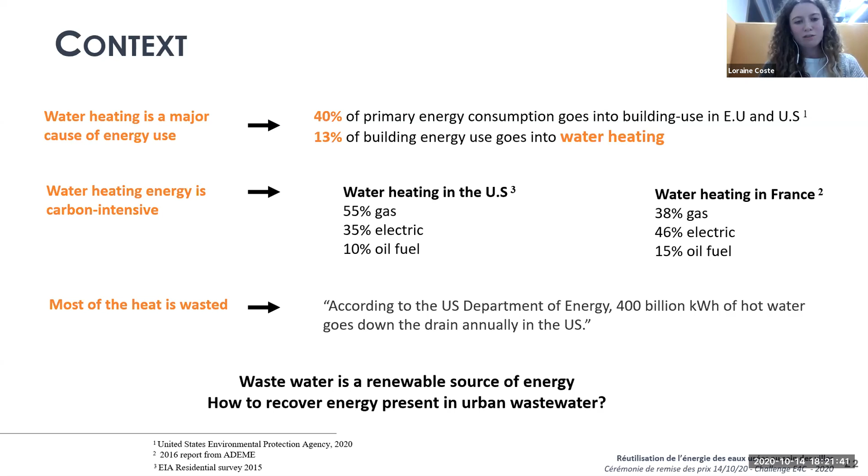Victor, your microphone is not on.

It's okay. So now I'm going to present to you the approach we used for this project. The first step was to properly define the scope of our study. This includes two main elements. The first one is the technologies. By technologies, we mean the machines that can recover thermal energy from wastewater. The second element is the segments. By segments, we mean the group of infrastructure where the technologies could be implemented.

In this step, we had to characterize, quantify, and size all of this infrastructure. Once we did this, we compared the potential of each segment in terms of energy, carbon, and economic indicators. This step helped us to conceive an action plan with a roadmap and the different steps needed to implement these technologies in the city of Paris. And then finally, we assessed the impacts in terms of carbon, energy, and economics of the global action plan.

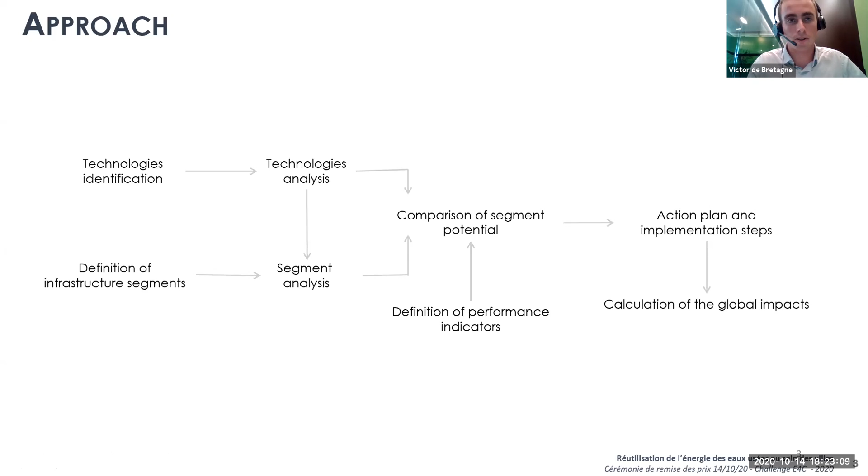In terms of wastewater, we identified three different sources of energy: mechanical, thermal, and biomass. The first two, thermal and mechanical, involve physical processes that can be valorized physically, so those are the ones we chose to explore. The last one is mainly based on chemical processes and is already valorized in a more central way, mostly in the sewage treatment plant outside of the city. As it is outside of the city, we considered that it was out of the scope of the study.

The interest of domestic waters lies essentially in their proximity to the need and to the heat takers. They also come under the responsibility of actors closer to the individual, with the possibility of smaller projects on the scale of neighborhoods or dwellings. And runoff water has a very low potential, so we did not dwell on that.

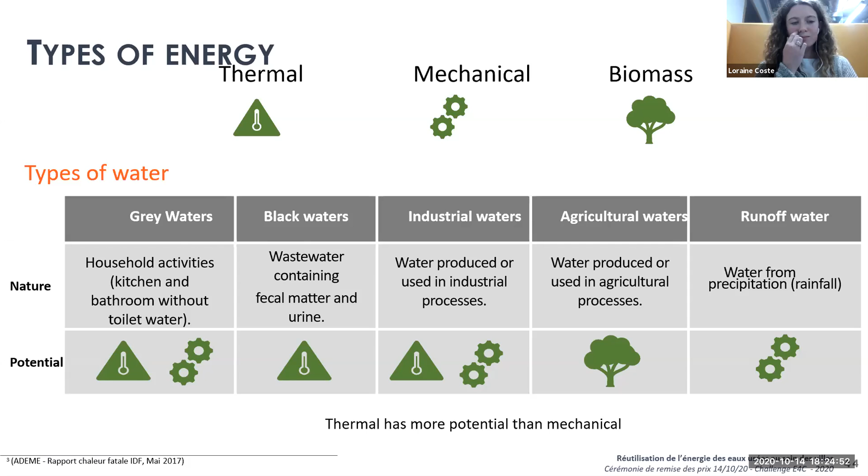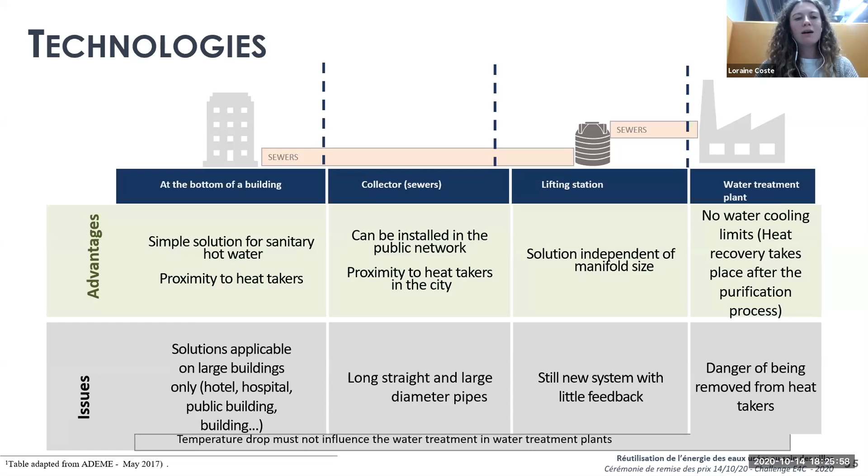We listed the advantages and issues for each of those locations. The water treatment plant was a little bit far away, and a lot of heat was lost along the way, so we didn't consider that one. For lifting stations, the technologies are not yet very well explored, so we decided to stay with the bottom of the building and the collectors.

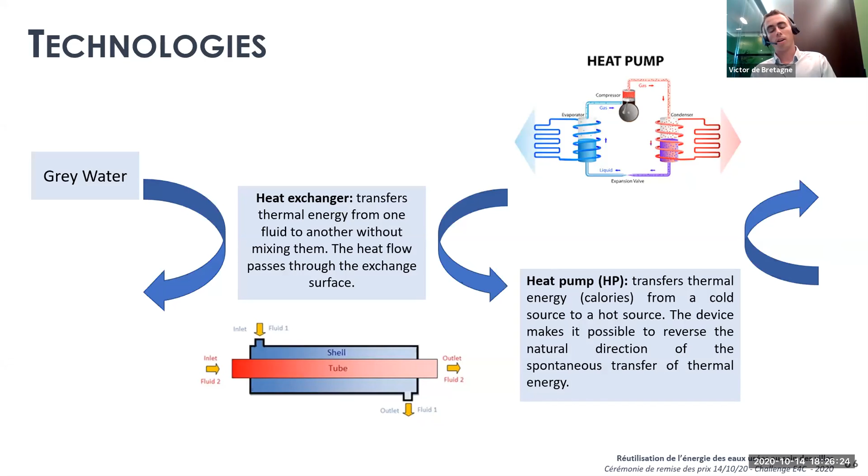So before I present the 3 technologies we chose, there are 2 concepts we wanted to clear. The first one is the concept of heat exchangers, which is an interface that allows a thermal transfer between 2 fluids. And the second concept is the concept of heat pump, which is a system that transfers thermal energy from a cold source to a hot source.

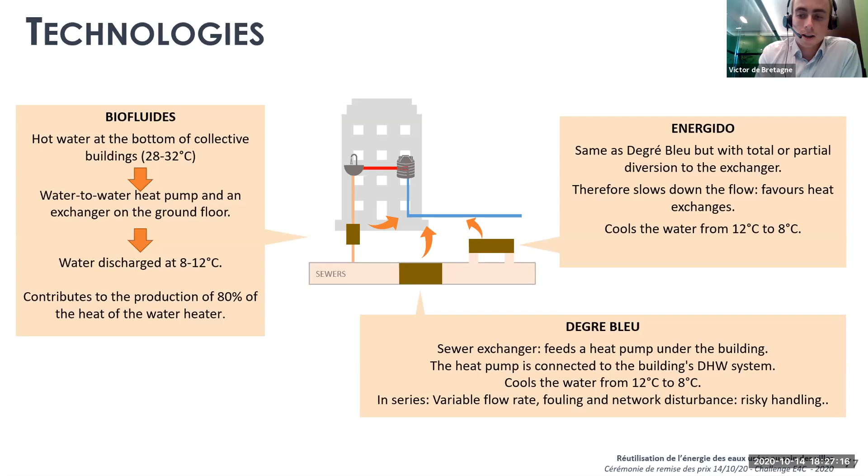The difference between Energido and Degré Bleu is that Energido is in total or partial diversion to the exchanger, while Degré Bleu is located directly in series in the sewer. So we studied these 3 technologies and all their technical specificities to then link them to each segment.

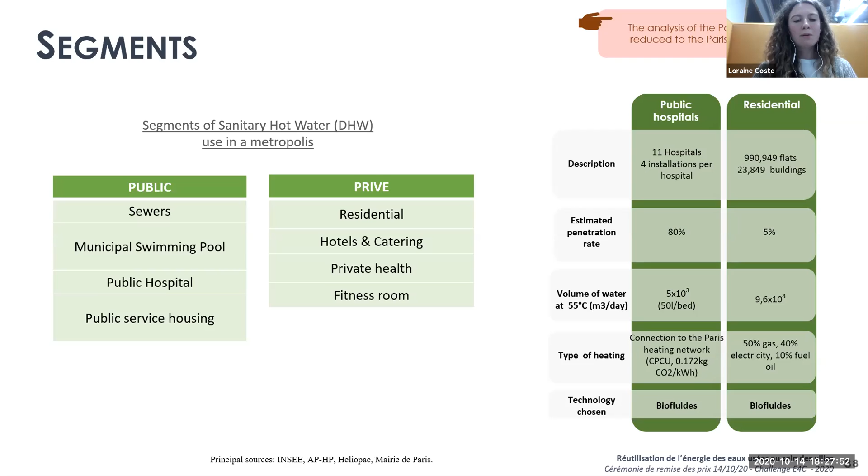So talking about segments, that's where we began the feasibility study for the city of Paris. Here we thought that the best way to lead this project was to separate Paris into segments of sanitary hot water. So as you can see here, we have the different segments we chose. We separated them into public and private segments because we thought that they had different acceptance rates from the actors, meaning that the public actors were more ready to accept new technologies or changes in the building, whereas private actors were more reluctant to pay more to change their heating system.

Afterwards, for each of those segments, we had to calculate the volume of water that could be used for our system. And we compared our new system that we want to implement to the old system, and then measured the amount of CO2 emissions we could save. So here I just added a small example about public hospitals and residential. As you can see, we have a penetration rate which is very different for those 2 sectors, as I explained before.

One of the hardest parts of that work was to measure the volume of water, because that was a lot of data mining for us throughout much information we could get from different websites or different data sources. So it might be a rough estimation, but we still managed to find something.

Finally, we had to find the type of heating which was already existing in those places. For example, public hospitals are linked to a heating network in Paris. So it's rather a good carbon emission heating, but we measured that our solution was still better than that one. And so with those measurements, we then were able to see if our solution was good in the city of Paris or not.

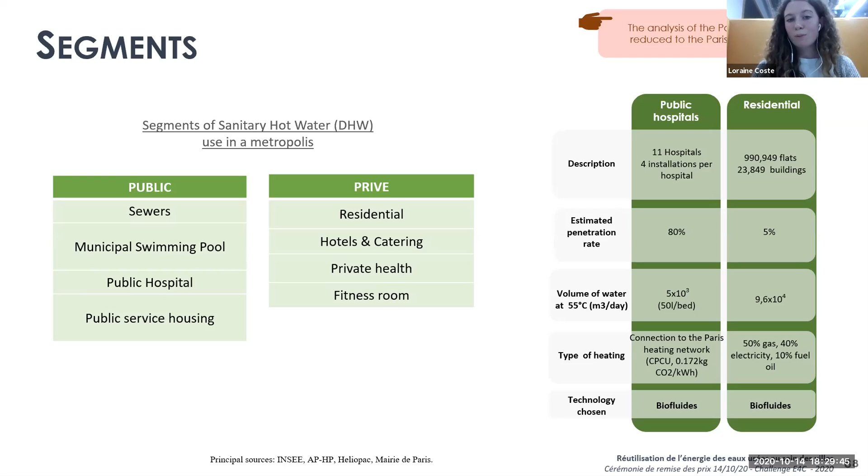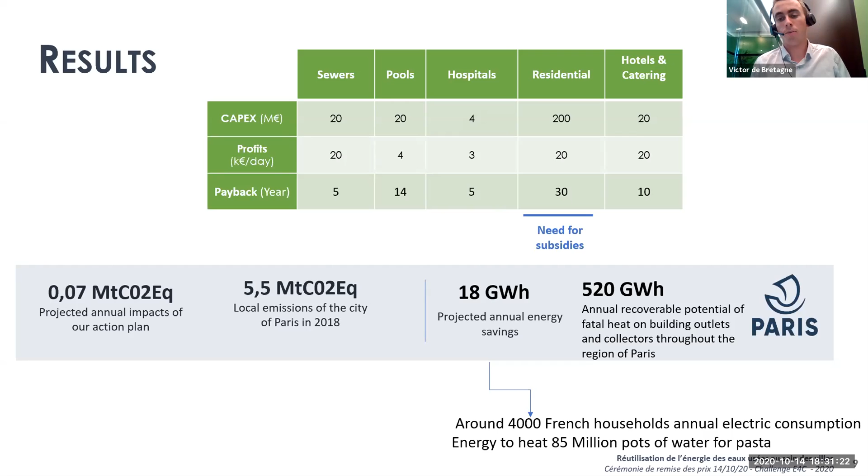What we see here is that we could reach about a hundredth of the emissions of the city of Paris. So this is quite a positive result. Of course, it is a rough estimation. It's an order of magnitude, but what we see is that it remains quite significant. On the bottom right, you have the energy indicators. What needs to be reminded here is that we could save an amount of energy equivalent to about four thousand French households.

Finally, what we want to really insist on is that we're conscious that this project has several limits. Of course, the results should be strengthened by the work of experts such as engineering firms. However, we remain quite convinced that there is a significant interest in the implementation of such technologies. The second point on which we want to insist is that there is clearly a need for a complete cooperation of all stakeholders. By stakeholders, we mean customers, engineering firms, local authorities, constructors. There's really a need for them to cooperate so that the action plan would be really efficient.

This also means that there is a need for an intermediary actor, something between the consultancy and engineering team, that could supervise the implementation of this technology in cities.